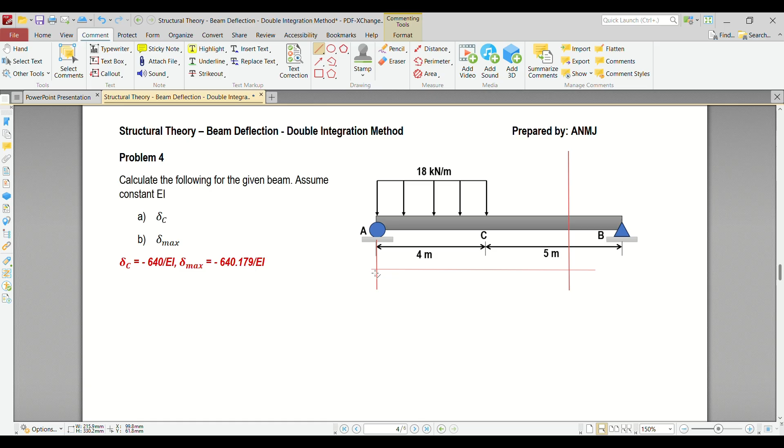So, just like what we did on our previous example, we need to cut the beam. Consider the left side. So if that's the case, this is the value of our x. From here to here, this is our x value.

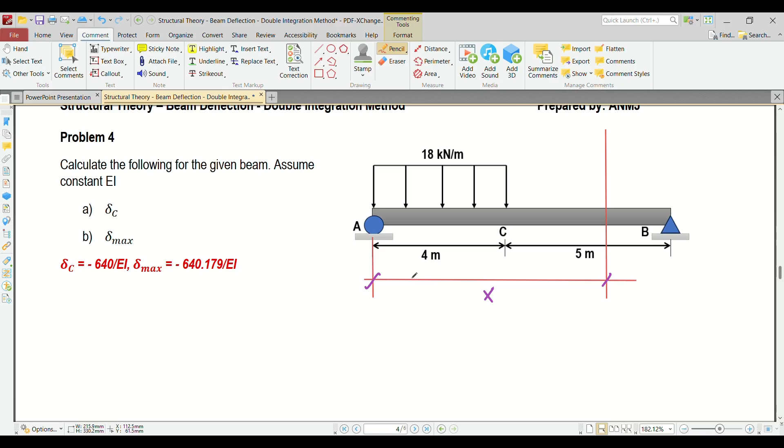Before we can compute the moment equation, we need to determine the value for the reaction at point A, this is RA. How do we get the value for RA? By taking the moment at point B.

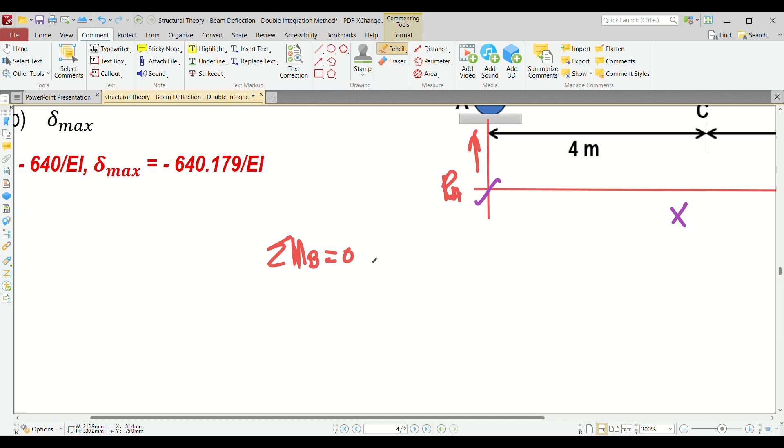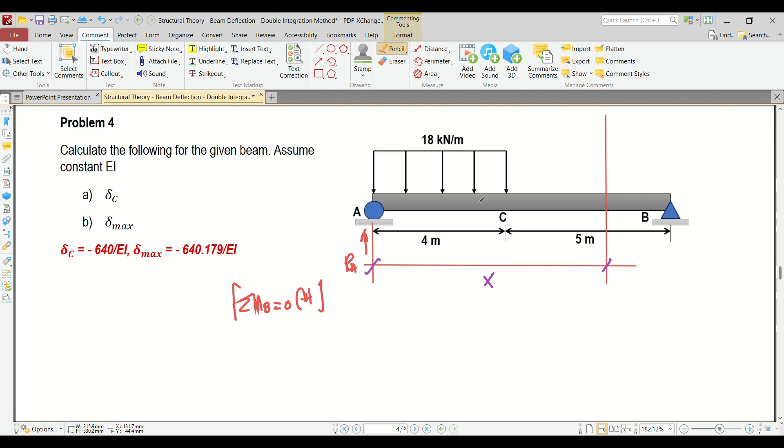So let's set summation of moment at B equals 0, clockwise positive. The distance of our beam is 9. So RA times 9 minus 18 times 4 times 5 plus 2, which is 7. So RA times 9 minus 18 times 4, the centroid is 7, equals 0.

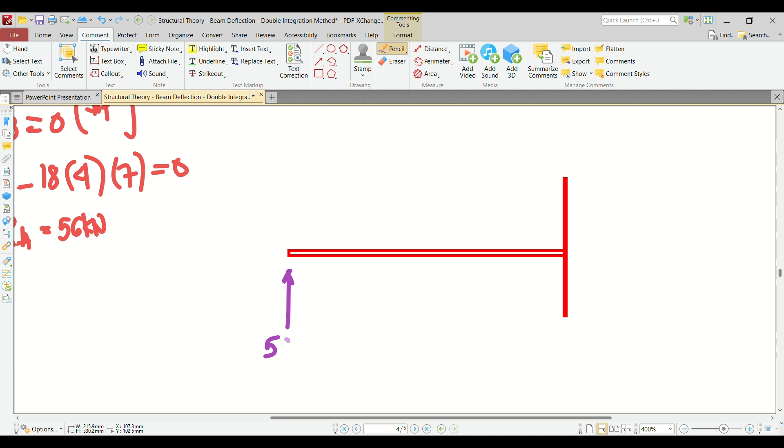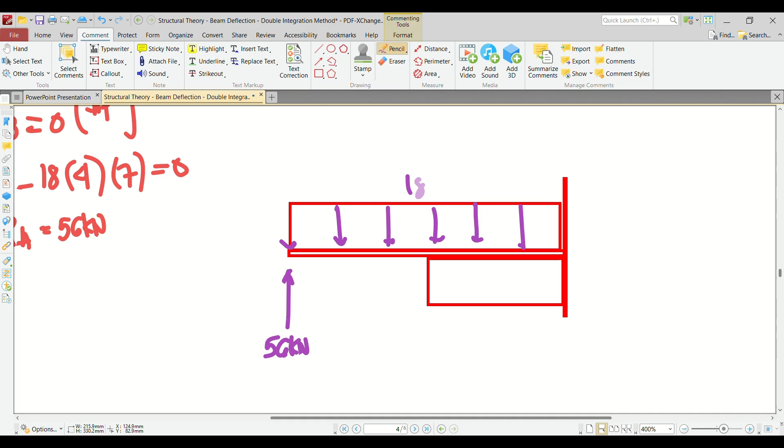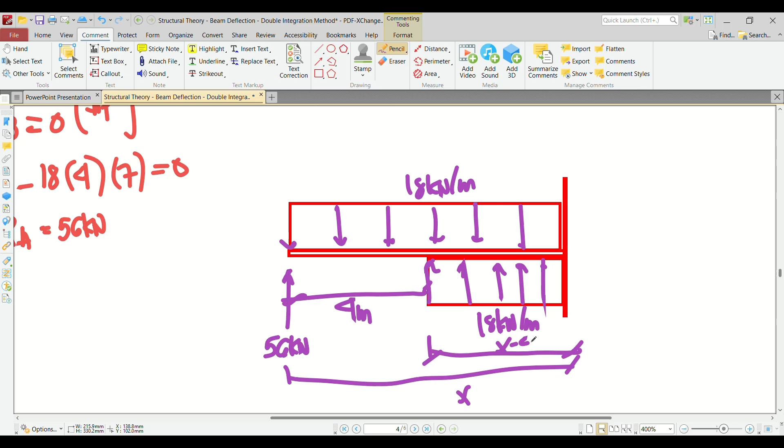Let's add the loading. This is 18 kilonewton per meter, and this is also 18 kilonewton per meter, but upward now. The distance from here to here is 4 meters, then from here to here is x, so what remains is x minus 4, if I'm not mistaken, so that's correct.

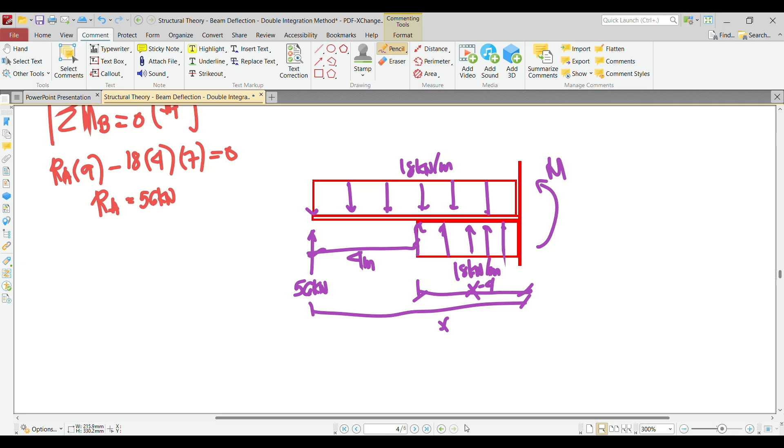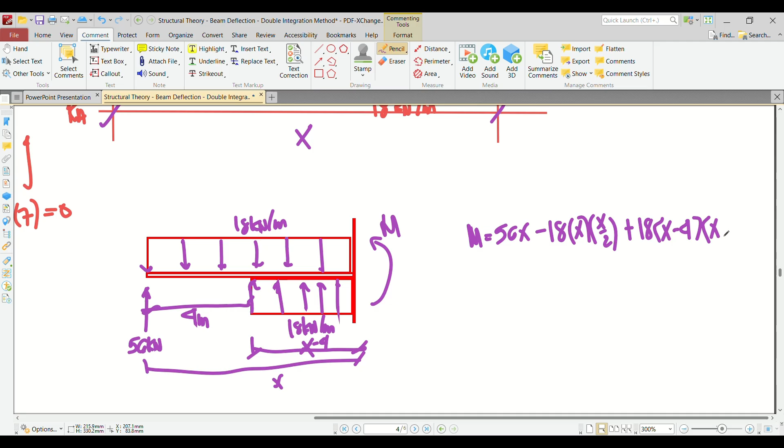So M is equivalent to 56x, minus 18x times x over 2. What else? And then we have, pointing upward, 18, so plus 18, but it should be in brackets: x minus 4, bracket, and the centroid x minus 4 over 2. So let's simplify and plug it into the elastic curve equation.

So what happens? We have EI y double prime is equivalent to 56x, this is negative 9x squared, plus 9 times bracket x minus 4 bracket squared. So we can now integrate.

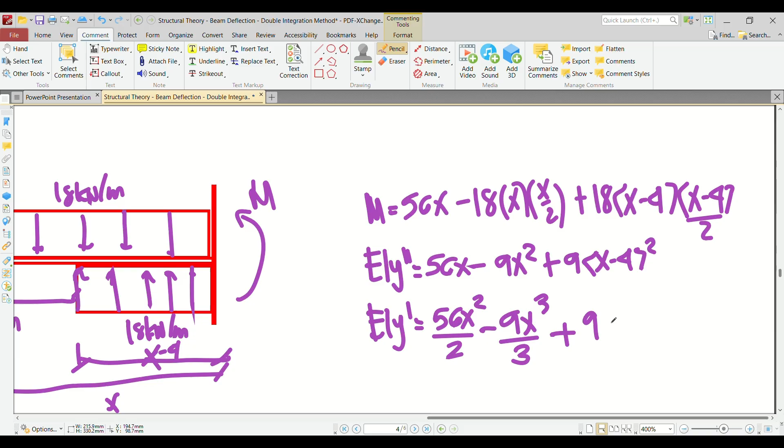So EI y prime is equivalent to 56x squared over 2 minus 9x cubed over 3 plus 9 bracket x minus 4 bracket cubed over 3, plus C1. Okay, and then another integration: EI y is equivalent to 56x cubed over 6 minus 9x raised to 4 over 12, plus 9 times x minus 4 over 12, plus C1x plus C2.

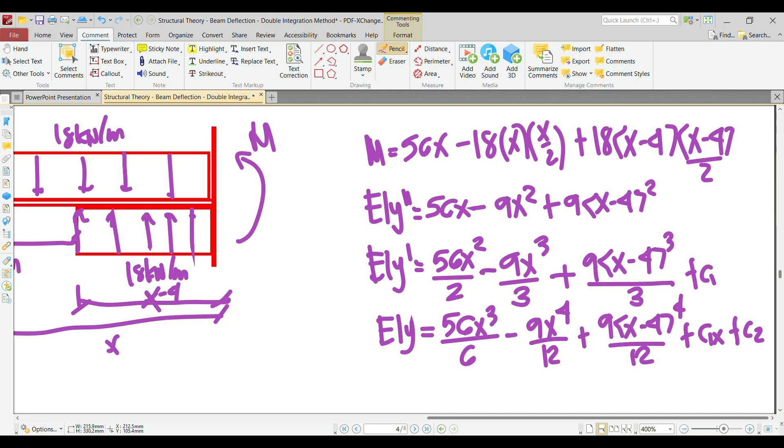Okay, so now what's next? Boundary condition. So boundary condition is when x equals 0, you're at the roller. When x equals 9, you're at the pin. Okay, let's try that.

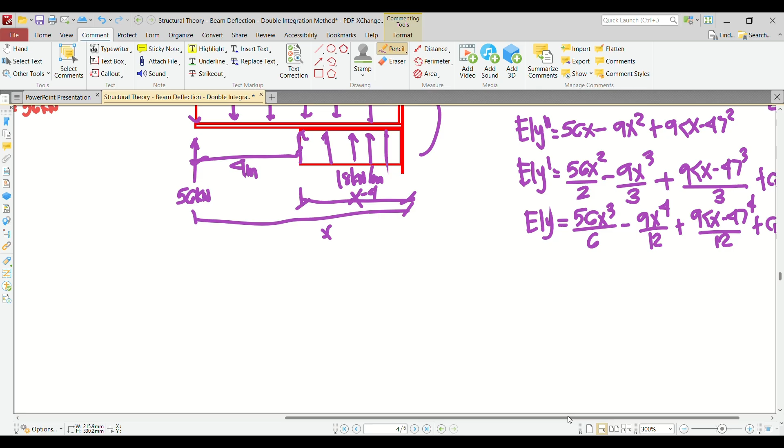So when x is equivalent to 0, your deflection is also 0. Now, if you take a look at our equation, if this is 0, 0, 0, 0, 0, then it's likely that C2 is 0. Okay, so let's go to the second boundary condition.

So what is the second boundary condition? When x is equal to 9, y is equal to 0. So let's plug in: 0 is equivalent to 56, 9 cubed over 6, minus 9, 9 raised to 4 over 12, plus 9, 9 minus 4, 4 over 12, plus C1 times 9. So what will happen? Give me the value of C1.

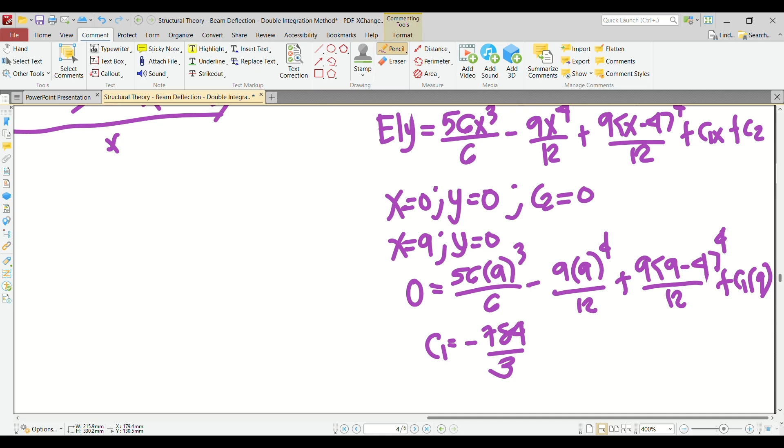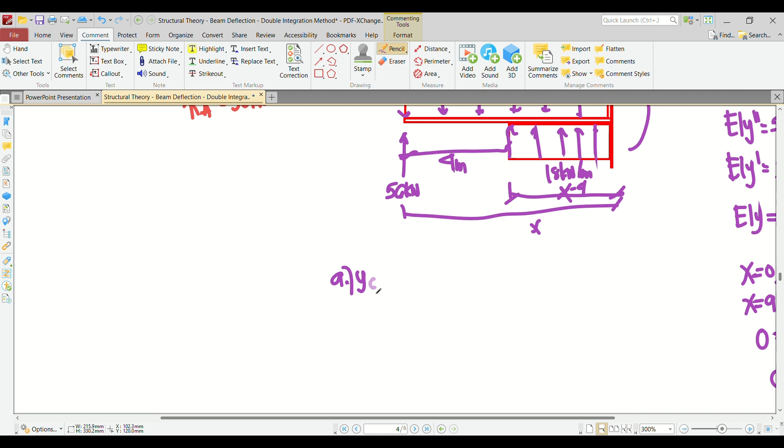Okay, so after that, you can now solve the unknowns, which in letter A, what's being asked is the deflection at C. So let's compute YC. To compute YC, the x value we should use is, where is point C? Here. So it should be equal to 4.

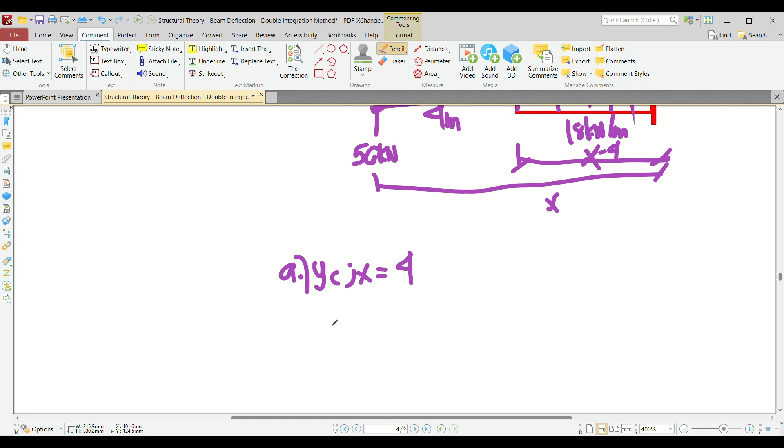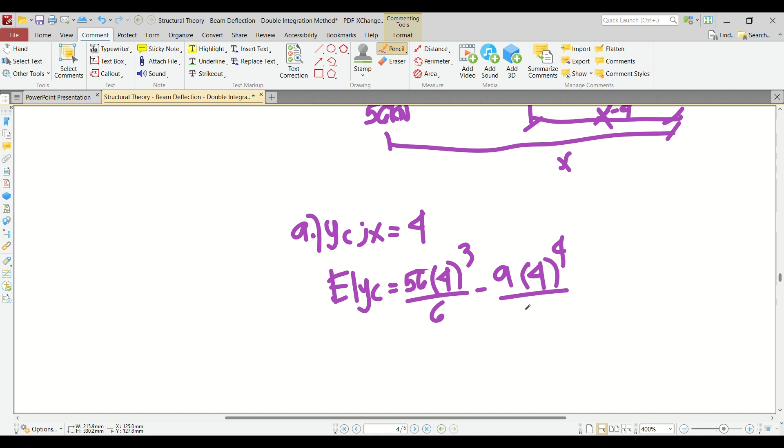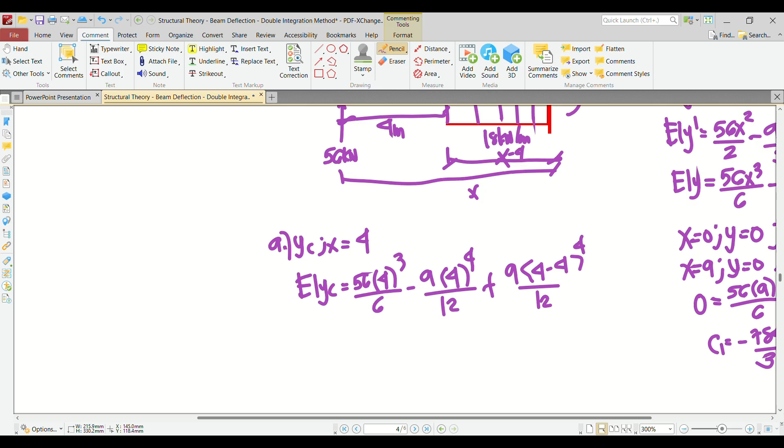Okay, let's proceed. So what happens? EI times YC is equivalent to 56, 4 cubed over 6, minus 9, 4 to the 4th over 12, plus 9, 4 minus 4, 12, continuing, 4, 4 over 12, and then lastly C1 times x, which is 784 over 3 times 4. So this will become 0.

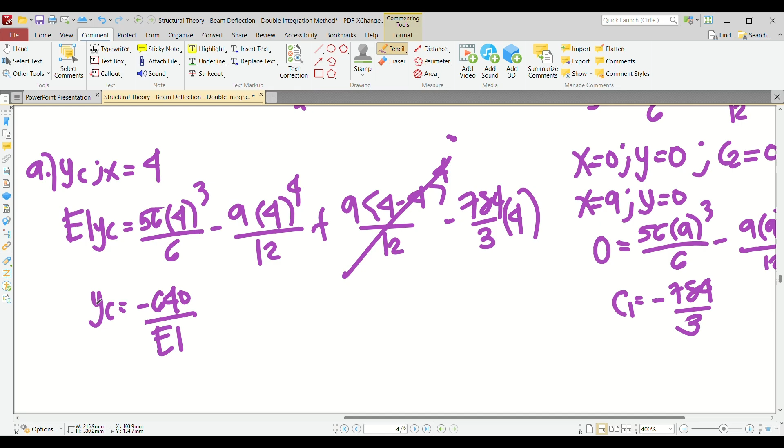So how much is YC? 4 cubed, 6 minus 9, 4, 4, 12, minus 784, 3... Negative 640 over EI. So this is our first answer for letter A.

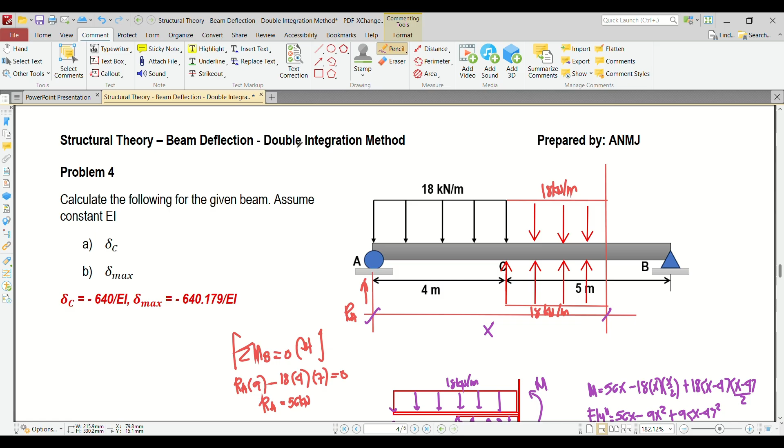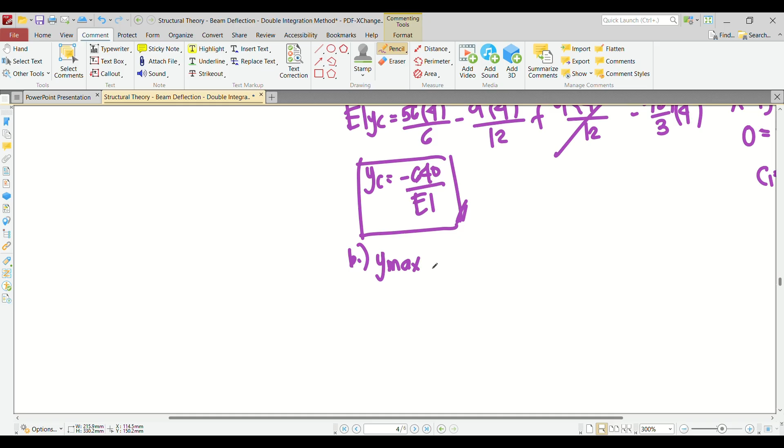Okay, for letter B, what's being asked is the maximum deflection. So how could we get the maximum deflection? Remember class, to get the maximum deflection, the slope should be equivalent to 0. So for B, Y max, to get that, the slope should be equivalent to 0.

And we will have cases. What are our cases? First case, maximum deflection will occur from point A to point C. Second case, maximum deflection will occur from point C to point B. So let's start with the first case.

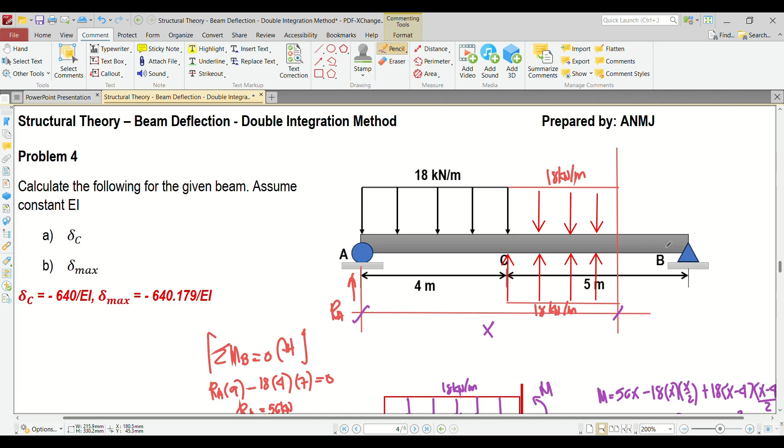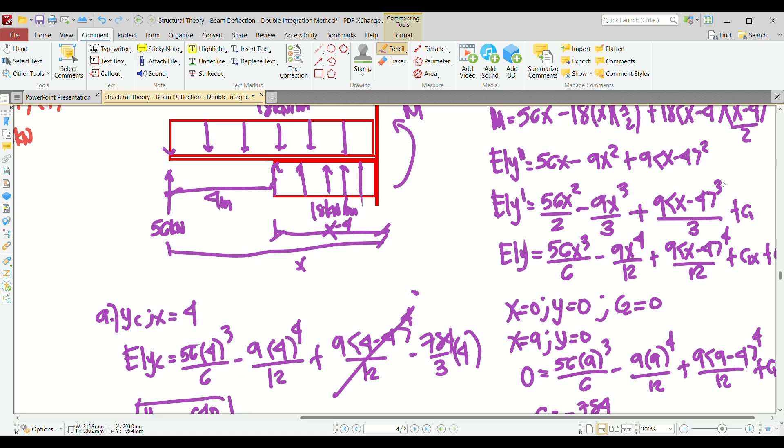So the x value should be less than 4 but greater than 0. If that's the case, in computing for the value of x or the location, we won't include this, because any number less than 4 will make this expression 0. So what will happen? Let's copy this.

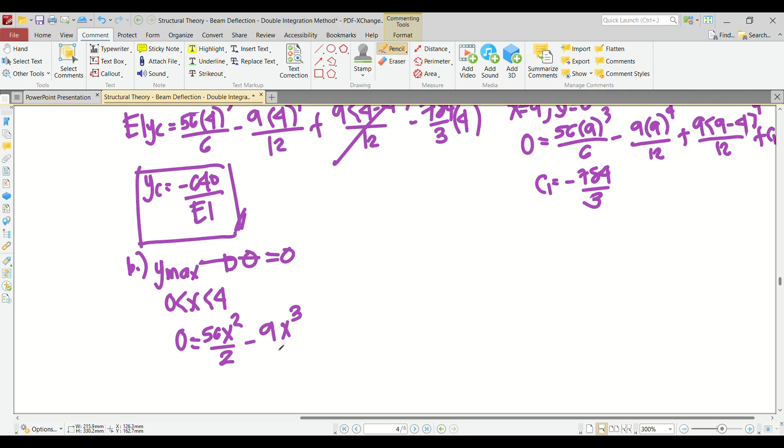So it becomes 0 is equivalent to 56 x squared over 2, and then minus 9x cubed over 3. Is that right, class? So this is it. So again this is 0, so we go to negative 784 over 3.

So what x value will we get here? Minus 784... 4.0671 meters. So as you can see, this is greater than 4, so it means this is incorrect.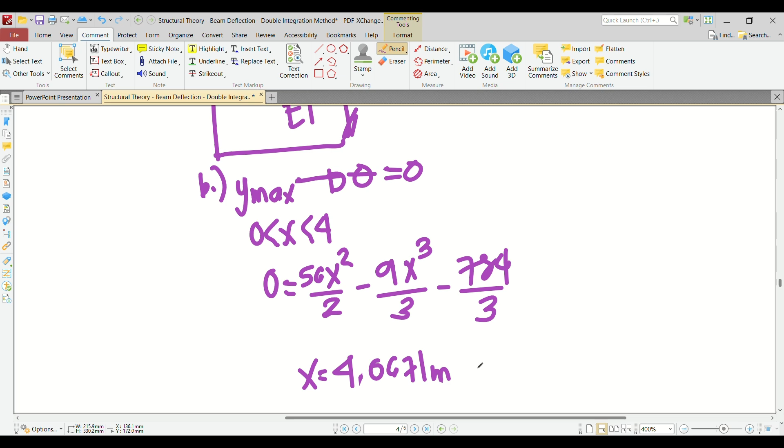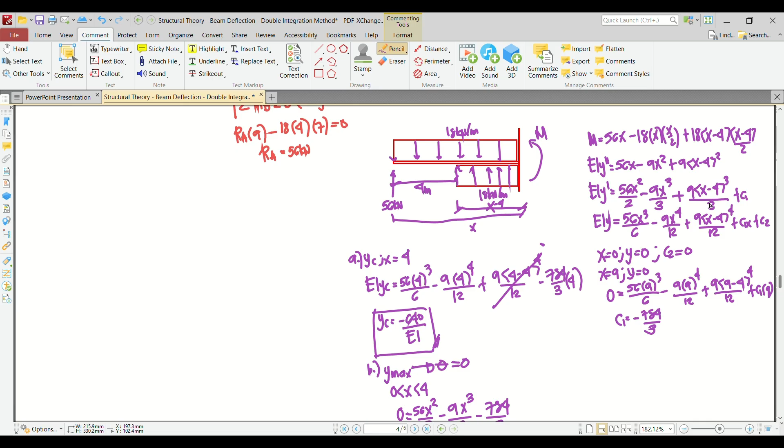So we should actually include the value of 9x minus 4 over 3 in our calculation for the maximum location of maximum deflection. Okay, let's include it. So what will happen? So our analysis now is beyond 4 but less than 9. So 0 equals 56 x squared over 2, minus 9 x cubed over 3, plus 9, x minus 4 cubed over 3, and then minus 784 over 3.

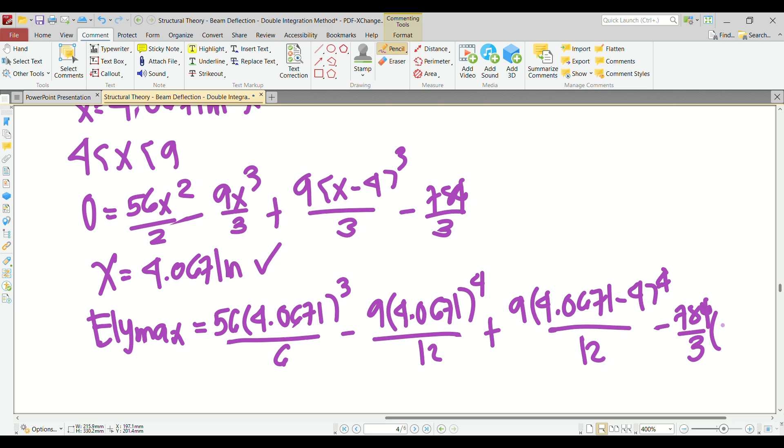So plus... over 3, that's 4. This is 4, this is over 12. And then minus 784 over 3, 4.0671. Okay, so when you compute that, class, the value for y max is equivalent to, how much is this?

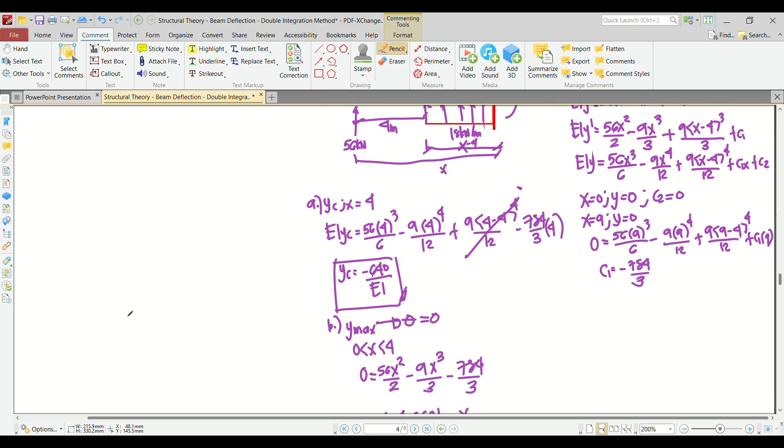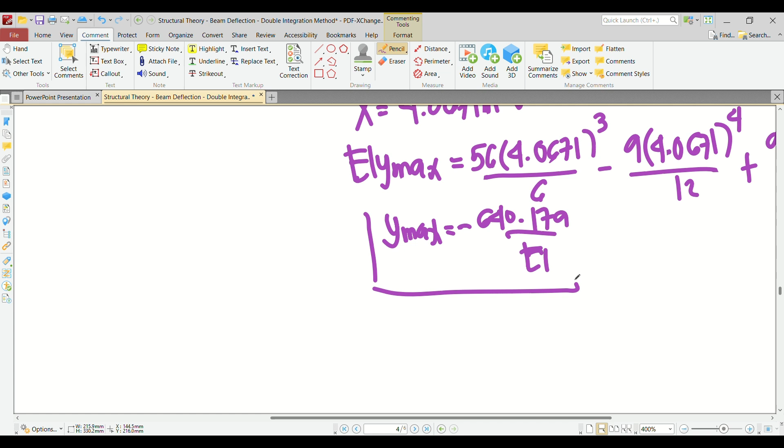Negative 640.179 over EI. Okay, so this is negative 640.179 over EI. Negative sign means that the deflection is downward. Okay, so that's how we answer problem number 4.

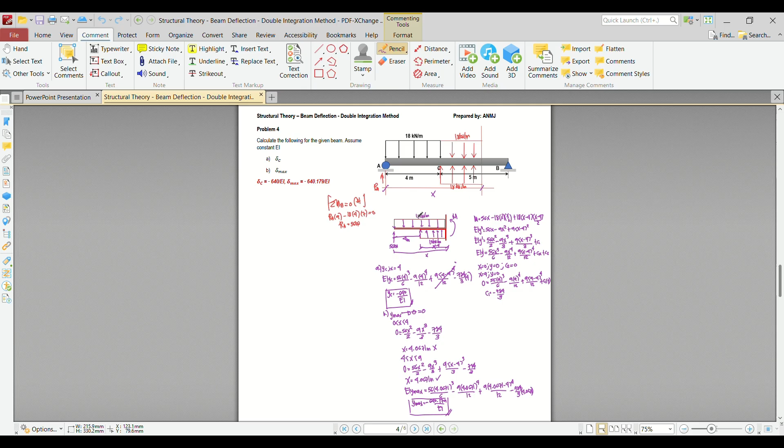Okay, let's try to solve our final problem for the double integration method. So we have here an indeterminate beam. What we need to calculate is the reaction at the propped support, the moment reaction at the fixed support, the vertical reaction at the fixed support, and the maximum deflection.

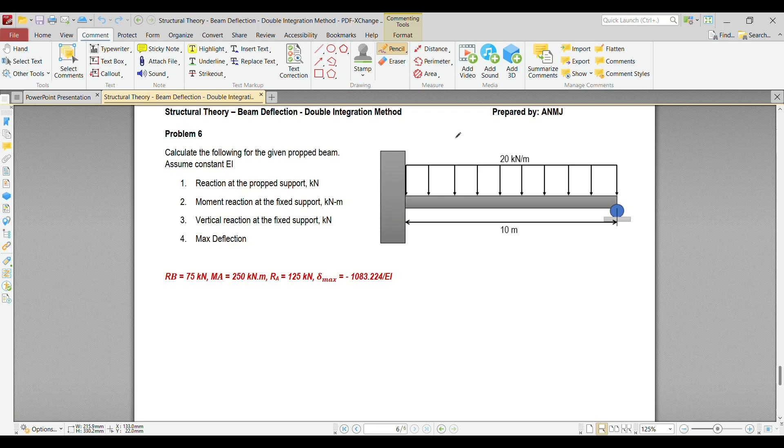By the way, this is a propped beam. When we say propped beam, it means one end is fixed and the other is roller or pin. So because it's a propped beam, it's indeterminate. Why? Because there are 3 unknowns here since this is fixed plus a roller. So 4 versus 3, this is statically indeterminate to the first degree.

So how do we get another equation aside from equilibrium in order to solve this beam? This will come from the deflection. Okay, so how do we solve this?

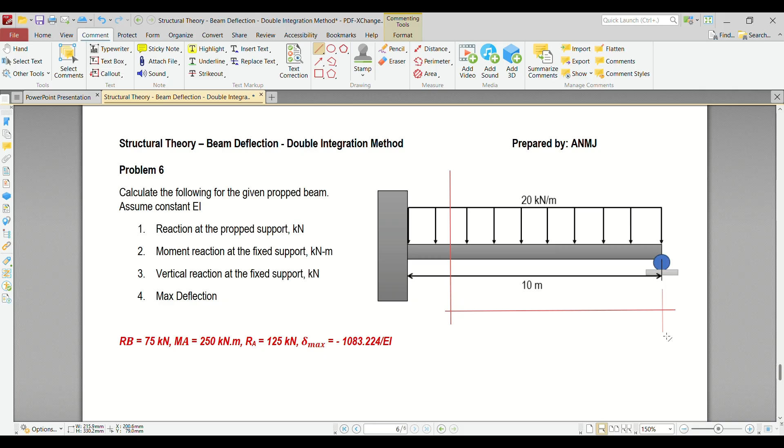We can cut it. Let's cut here. Now when I cut there, you can also consider the right side. Doesn't matter, just be careful with your sign convention. Because the deflection stays the same, but the slope might flip. Be careful with that, and just focus on the shape of the elastic curve. It's also better to draw it out.

So now this distance, class, is x. We need RB, but we cannot solve RB because this is indeterminate. So let's call this point A, and this point B. We cannot solve RB directly because it's indeterminate.

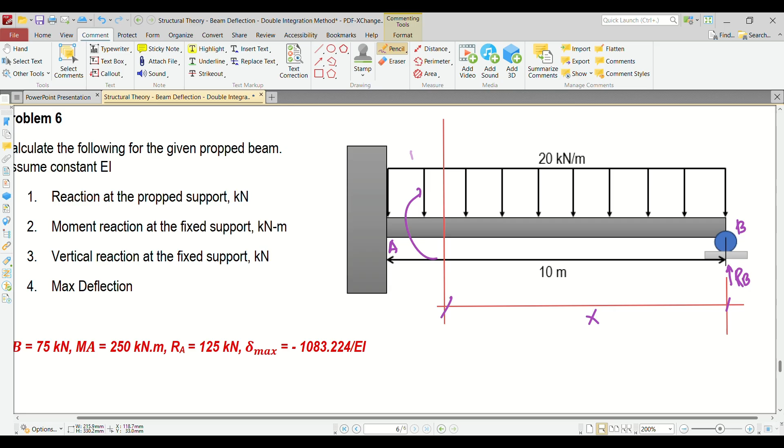So we can already create a moment equation. When you consider the moment, considering the right side of the cutting plane, your moment must be in the clockwise direction. So let's cut it and isolate it.

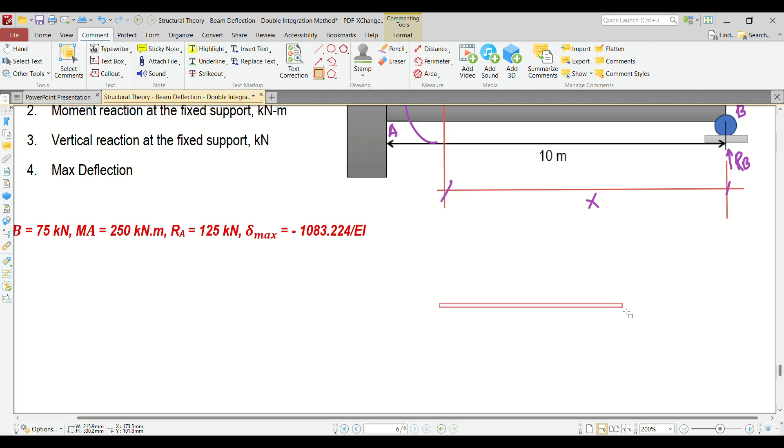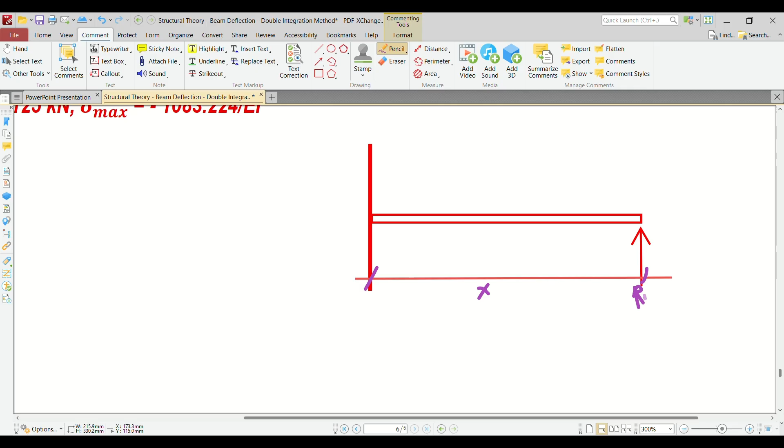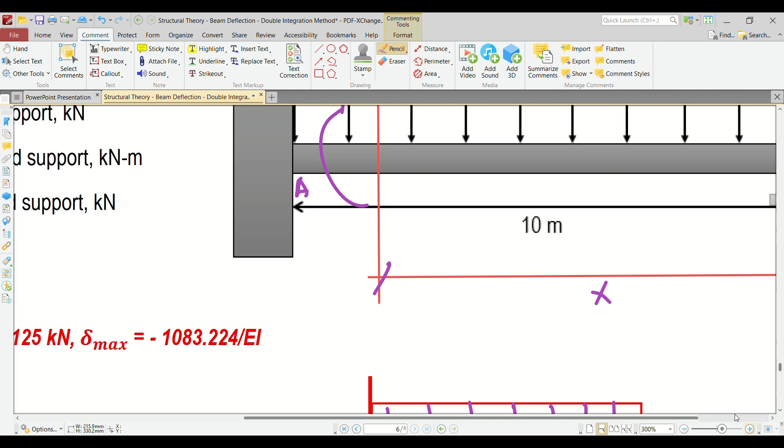We have RB here. So from here to here, this is x. Our reaction here, RB, we don't know. And we have uniform loading, right? How much is our uniform loading? I think this is 20 kilonewtons per meter.

So again, clockwise, let's create the moment equation. So M is equivalent to RB times x minus 20 times x times x over 2. Opposite direction is positive, same direction is negative. Since it's opposite, it's positive. So EI y double prime is equivalent to RB x minus 10x squared.

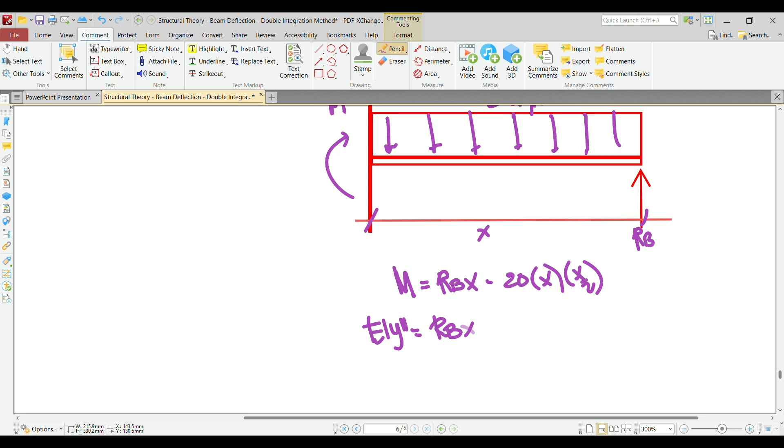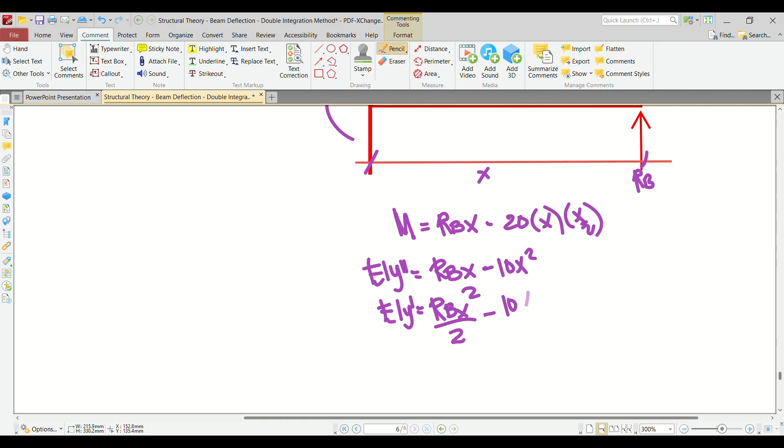What's next? Let's integrate. So EI y prime is equivalent to RB x squared over 2 minus 10x cubed over 3 plus C1. Another integration, so EI y is equivalent to RB x cubed over 6 minus 10x to the 4th over 12 plus C1x plus C2.

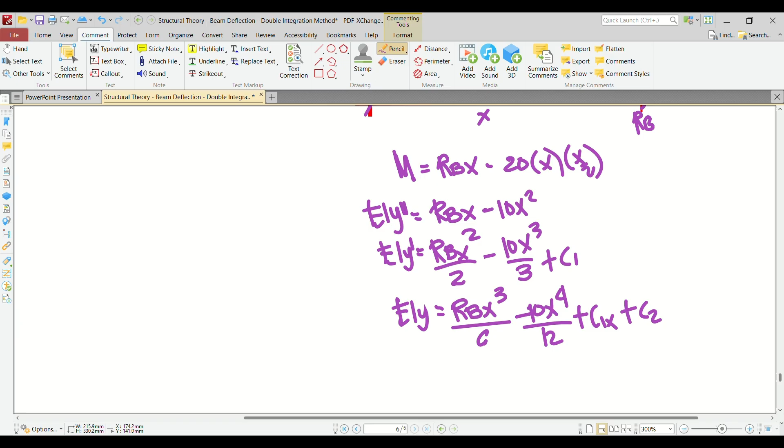Next is boundary conditions. This is where we started x. So we have x equals 0, and x equals 10. Let's try x equals 0 first. When x equals 0, y equals 0. Since x equals 0 and y equals 0, that means this term is 0, this is 0, this is 0, this is 0. So likely C2 equals 0. Next, like I said, x equals 10, y equals 0.

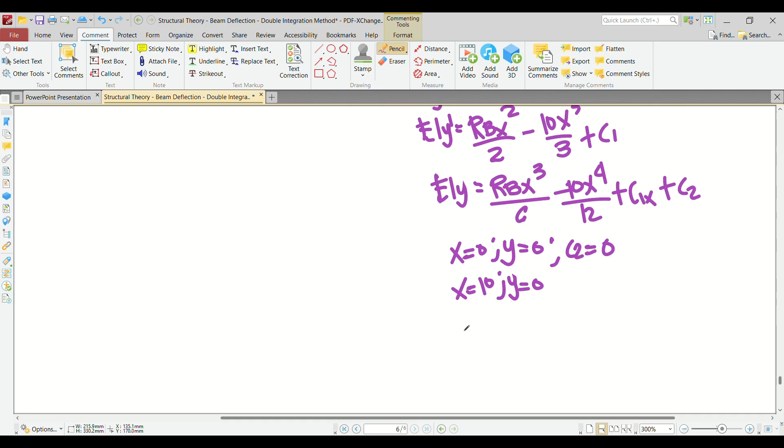Right? So let's plug it in. Why is y equals 0 when x equals 10? Because this is a fixed support, and remember, at a fixed support, we don't have any deflection there. So what happens? 0 equals RB times 10 cubed over 6 minus 10 times 10 to the 4th over 12 plus C1 times 10 plus C2. So we don't have C2 yet.

Sorry, I haven't written it yet. So we have two unknowns here for a single equation. So let's create equation number 1. Let's simplify 10 cubed over 6 first, how much is that?

That's 500 over 3. EI - oh we don't have EI yet, that's 0. So 500 over 3 RB. And then this is plus 10 C1. Let's simplify this: 10 times 10 to the 4th, divided by 12.

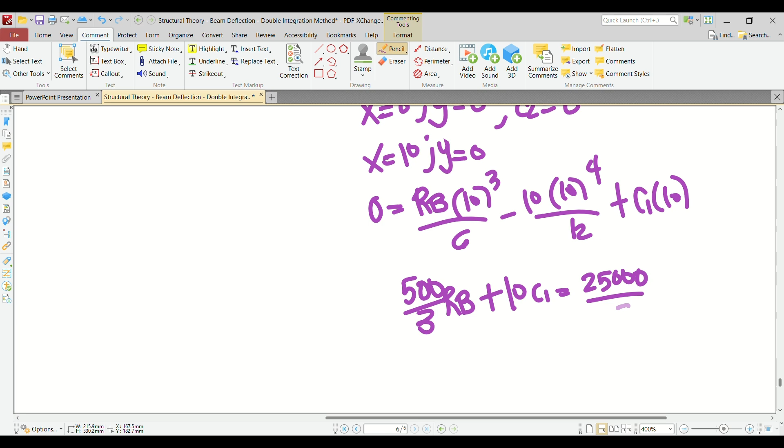That's 25,000 over 3, negative. When you move it to the other side, it becomes positive. So 25,000 over 3. So this is now your equation number 1.

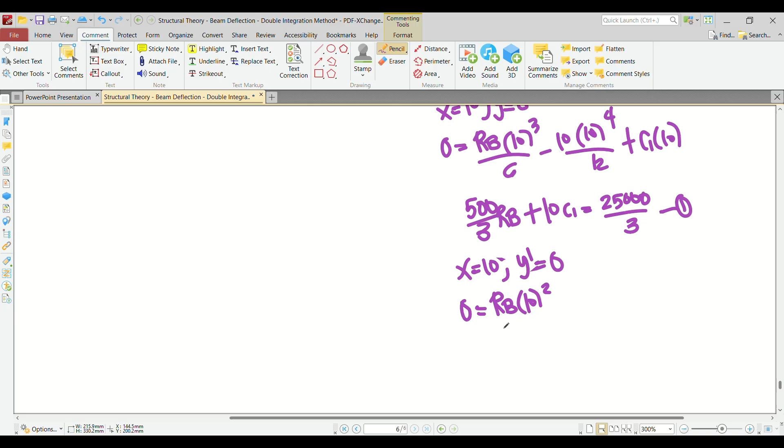So how? So 0 is equivalent to RB times 10 squared over 2 minus 10 times 10 cubed over 3 plus C1. Right, so there's no more 10 there. So what happens? This is 100 divided by 2, that's 50, times RB, and then plus C1 is equivalent to, this is 10 cubed.

10,000 over 3, negative. Kapag nilipat mo, magiging positive 10,000 over 3. So this is now our equation number 2. Solving two equations, two unknowns simultaneously, para makuha yung value ng RB at C1.

Mode 5, 1. 500 divide 3. 10, 25000, divide 3. 50, 1, 10000, divide 3. Okay, so yung RB ko is 75 kilonewton, and then yung C1 ko is negative 1250 over 3. So pwede na natin ma-solve.

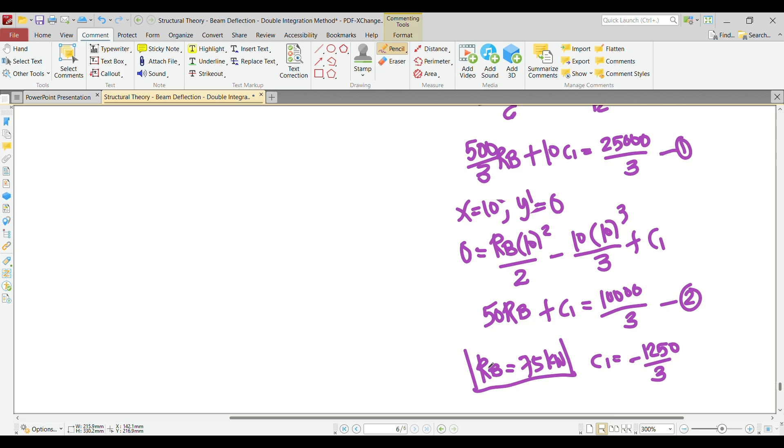Actually, ito na yung sagot sa number 1 or problem number 6. Pinapahanap kasi yung reaction sa propped support. So yan na yun. For number 2, ito lang din yun.

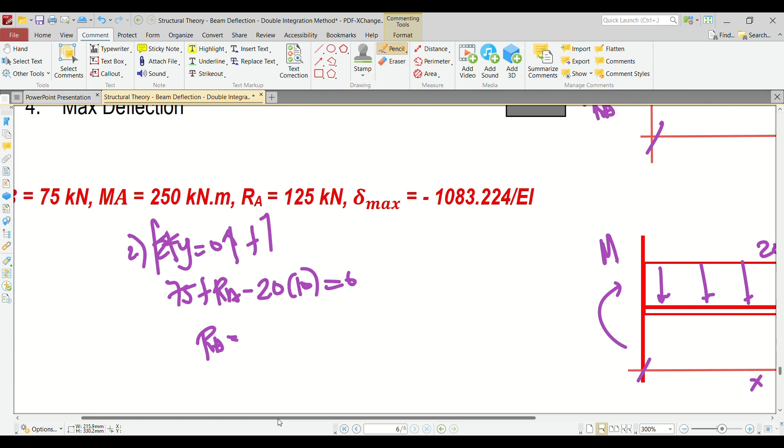RA, how do we solve for RA? Summation of forces vertical equals 0, upward positive. So we have 75 na upward, kaka-compute lang natin, plus RA minus 20 times 10, yung uniform loading, equals 0. So yung RA natin is equivalent to 125 kilonewton. That is our answer.

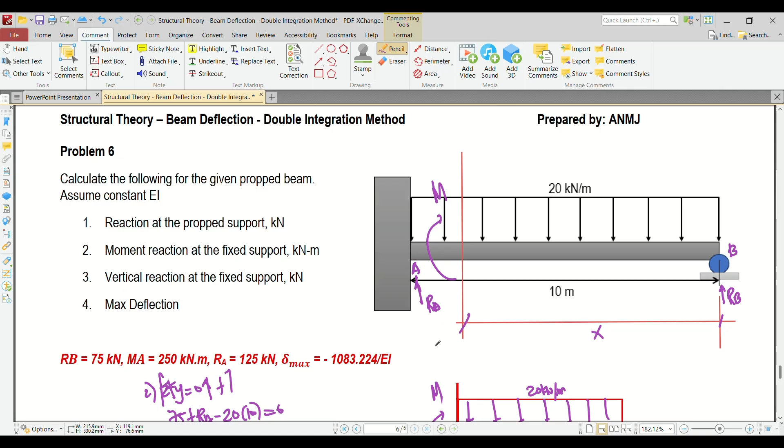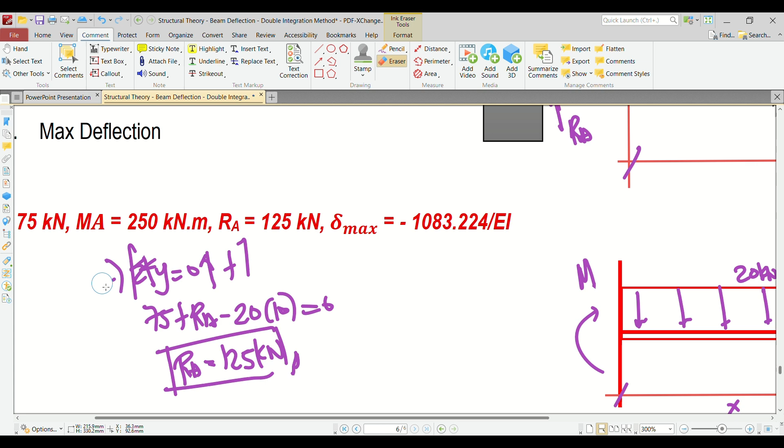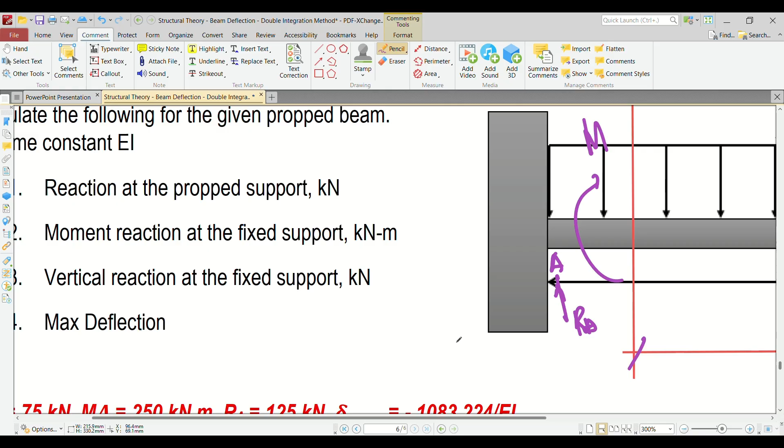Ngayon, paano naman natin kukunin si MA? Number 3 pala ito, class. For number 2, that is moment at point A. Paano natin makukuha si MA? Assume muna natin na yung moment sa point A is counterclockwise. Pwede tayong mag-moment sa point A to determine the value of MA.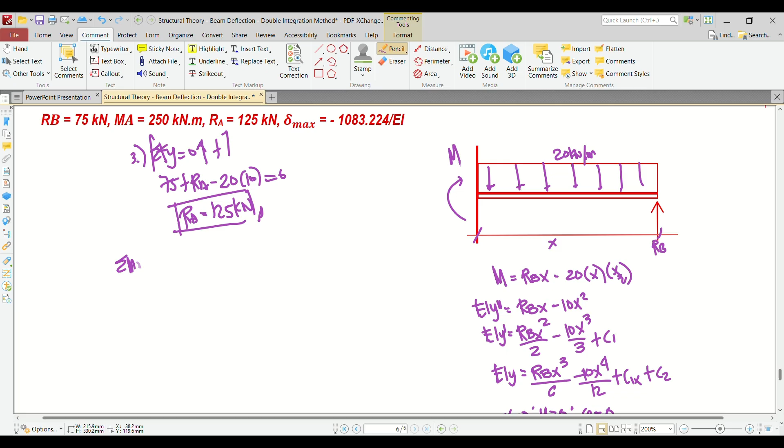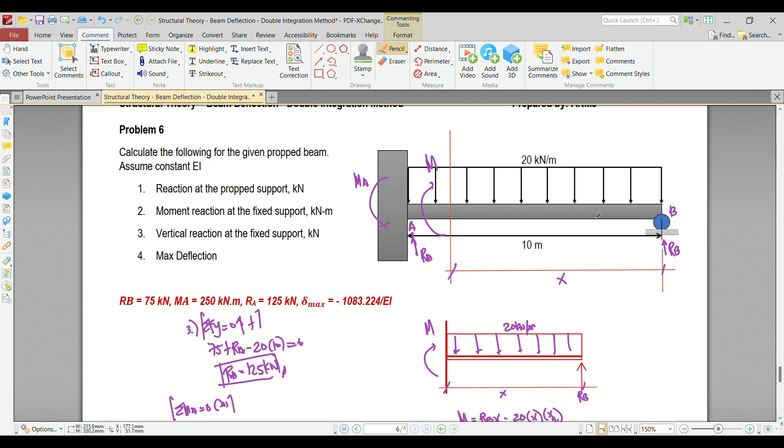Summation moment sa A equals 0, clockwise positive. Since counterclockwise ang in-assume ko sa MA, that would be equivalent to negative MA, plus 20 times 10 times 5 minus RB times 10. So plus 20 times 10 times 5 minus 75, the reaction sa B, times 10, equals 0. So what's the value for MA?

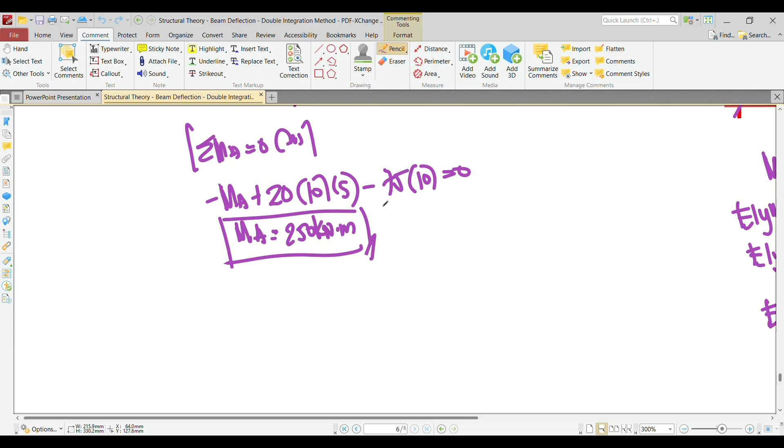So ang nakukuha ko, class, is 250 kilonewton meter. Positive, so it means that our direction is correct. Kapag nag-negative, palitan mo lang ng direction. And then lastly, we need to find the value for the maximum deflection.

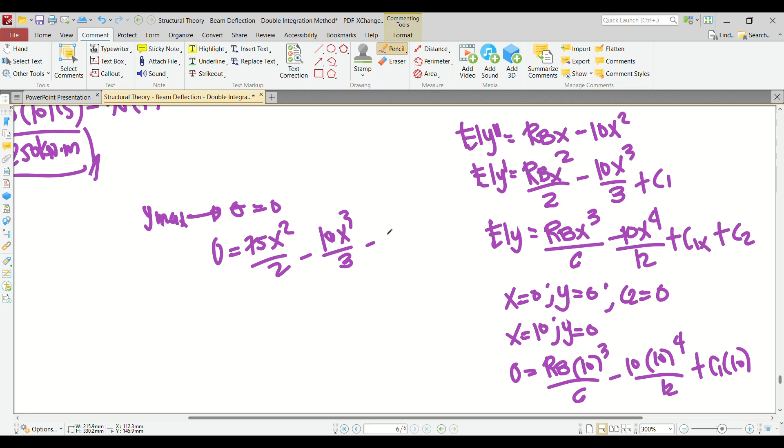So again, to compute for the maximum deflection, y max, the slope must be equivalent to 0. So 0 is equivalent to 75 times x squared over 2, yung RB natin, 75, minus 10, x cubed over 3, minus 1,250 over 3. Anong value natin for x? So let's be careful in doing shift solve in this kind of equation.

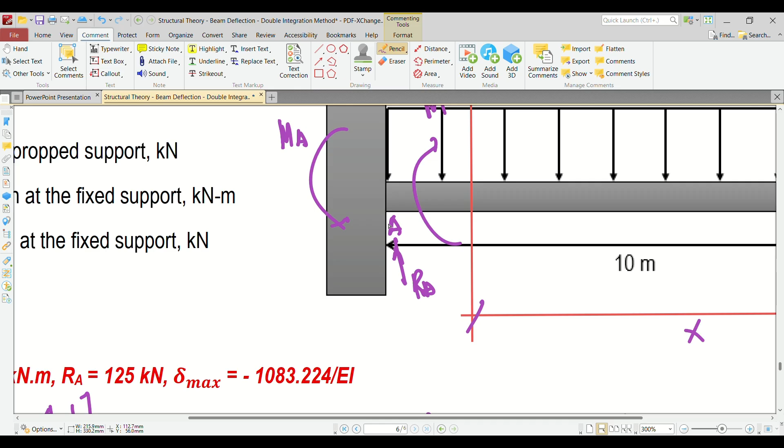Wait lang, calculate ko lang. Bakit? Kasi pag nag-solve ka ng initial value ng x, o pag nilagay mo yung initial value ng x na malapit sa 10, ang lalabas na x value sa'yo ay 10. Bakit? Kasi yung 10 kasi is considered also as a solution for this equation. Alam natin na kapag x is equals to 10, yung slope is also equivalent to 0. Ginamit nga natin dito yun. Tama, ginamit natin dito. So ngayon, dapat pag mag-shift solve ka, yung initial value mo ay dapat between 0 to 10 pero not close to 10. Mga 5 or 4, pwede na yon.

So ang nakukuha ko, class, is 4.2154 meters. So anong next step? Next step is we need to plug in this in our deflection equation. So EI y max is equivalent to 75, x is 4.2154 cube over 6, minus 10, 4.2154 to the 4 over 12, and then C1. Ano yung C1 natin? Negative 1,250 over 3, times 4.2154. So what's the value for Y max?

1,250 over 3. So ang nakukuha ko is negative 1083.224 over EI. So this is now your answer for the maximum deflection.

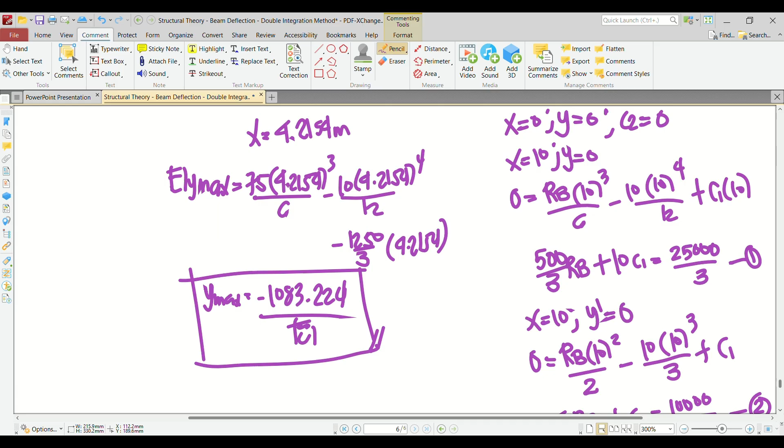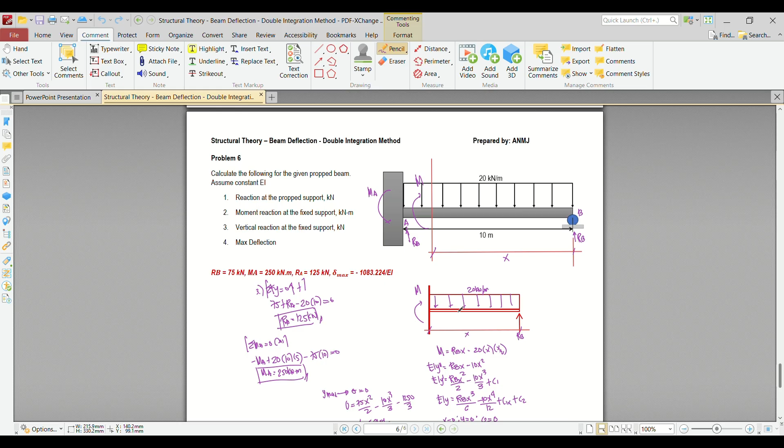So that's how we solve problem number 6, indeterminate. Ang ginawa lang natin is nagdagdag tayo ng equation dun sa equilibrium equation using the concept behind deflection. So the next topic will be beam deflection area moment. See you guys.